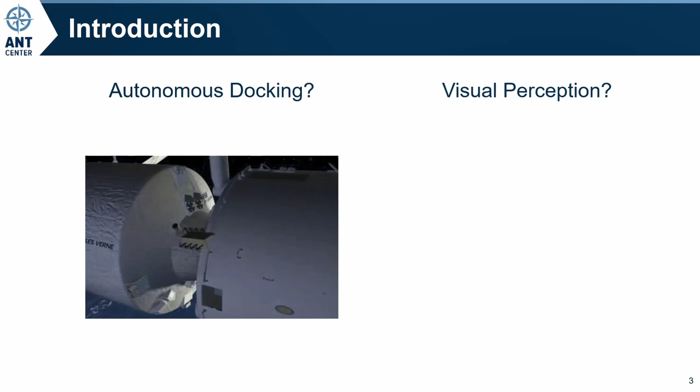So as my title suggests, the problem I'm trying to solve is autonomous docking, and how I'm doing it is through visual perception. So what do these terms mean? In the context of this work, autonomous docking is the approach, contact, and connection between two vehicles without human intervention, while visual perception is the intelligent interpretation of what is seen. So what I'm trying to do here is give machines visual perception, just like we as humans have.

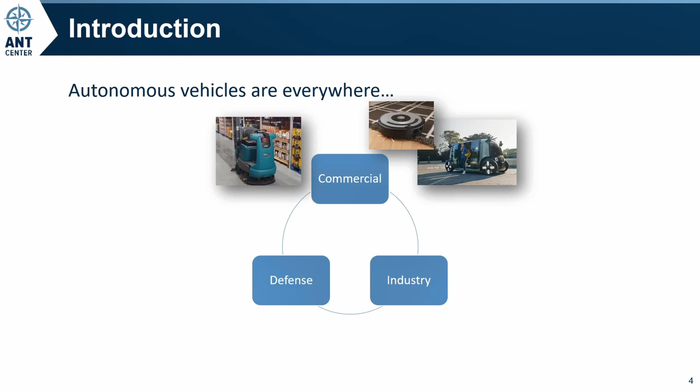But first, why is all this important? Well, turns out autonomous vehicles are popping up everywhere. Whether we realize it or not, we all rely upon them in our everyday lives, either directly or indirectly. So here's just a few examples. In the commercial sector, we have autonomous vehicles vacuuming our carpets. If you've been to Sam's Club lately, you've seen this guy wandering the aisles, scrubbing the floors. We're seeing them pop up in commercial transportation and delivery services.

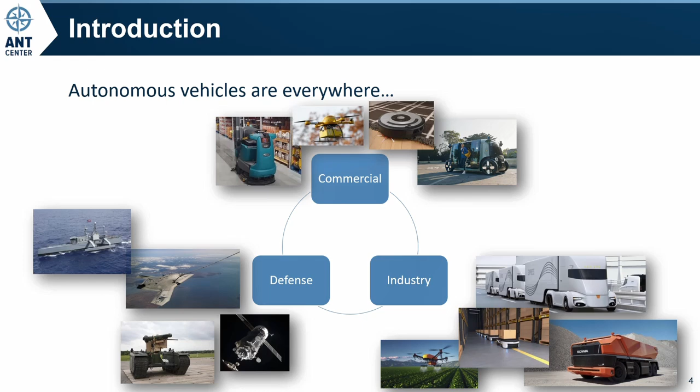On the industrial side, we're seeing autonomous freight, mining and excavation, agriculture, and if you've purchased anything on Amazon, your 2-day shipping is made possible by these guys. In the defense sector, we're starting to see them in air, space, land, and sea, and that's just touching the surface. But there's a problem.

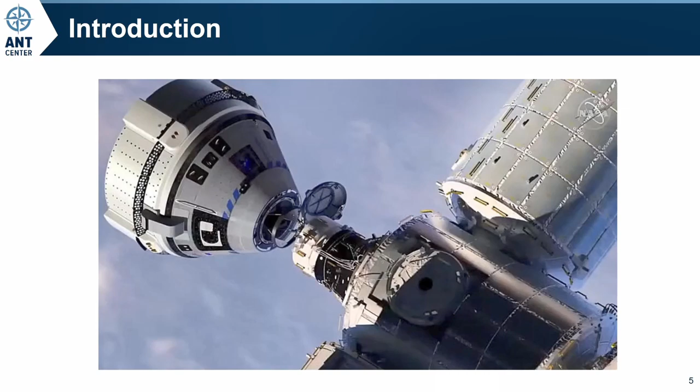Despite their growing presence, autonomous vehicles are limited in their ability to interact with each other and their surroundings. Without autonomous docking, they cannot perform complex tasks such as docking for maintenance and crew transfer in space, transferring cargo, passengers, or data at sea, or refueling mid-air. These limitations hinder their operational range, endurance, and effectiveness. Autonomous docking, once solved, overcomes these barriers and significantly enhances their operational efficiencies.

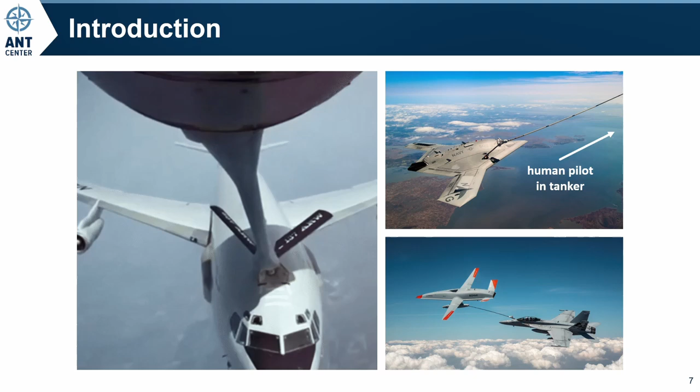In this work, I focus on the aerial refueling use case because of its complexity. On a scale of very difficult to super easy, this task is right at the top. And so the idea here is if I can solve this really hard problem, then I also solve the rest. But I know what you're thinking. Humans already perform these complex maneuvers. So if it's not broke, why fix it?

Well, it turns out us humans are very expensive. We require long training pipelines, we have physical requirements, we make mistakes, and eventually we get old and have to retire, many times taking with us years or even decades of experience. So my solution is to completely remove the human from the loop, mitigating all these factors, and this is how I do it.

My solution is motivated by how humans perform complex docking maneuvers. That is, by using their visual perception, as you see here, along with their hand-eye coordination. In this work, I replaced the human perception with computer vision and machine learning to enable machine hand-eye coordination. Thus, my problem statement is to develop an algorithm that is accurate, reliable, and fast enough to solve the autonomous docking problem, specifically such that it has high performance and generalizes well across real-world operating conditions.

So, what has already been done in this field? I'll begin by answering why computer vision is necessary. We'll take a look at the limitations of traditional analytical approaches, how machine learning overcomes these limitations but requires massive training data sets. We'll then explore the trade-offs between manual and automated annotation techniques, how transfer learning on synthetic images shows promise. Then we'll look at recent work here at AFIT that my research built upon.

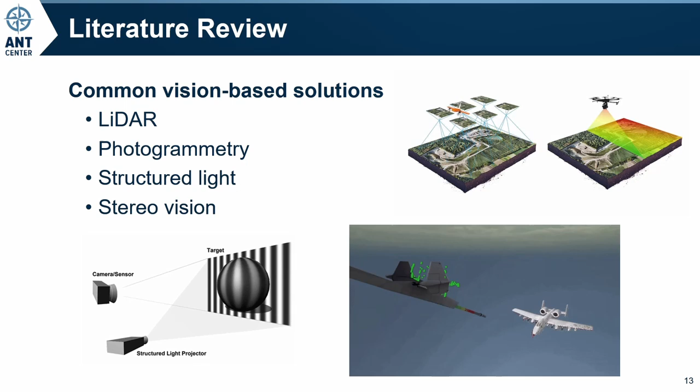This method follows a four-step process where an image is captured, 2D features in the image are found, and a correspondence is made with the 3D features on the object, which are then converted into a pose estimate with methods such as the perspective-n-point algorithm. So just real quick, I want to clarify that pose in this work is the combination of position, XYZ, with orientation, yaw, pitch, and roll. So anytime I say pose, I mean all 6 degrees of freedom there.

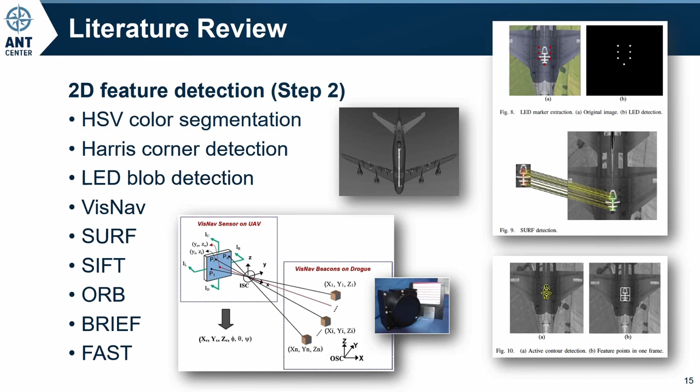The problem with this four-step approach is that in step 2, traditional feature detection methods are unreliable and do not generalize well across varying lighting conditions. In other words, step 2 is very hard. For example, here are some analytical methods commonly used in step 2. These methods are capable of accurate 2D feature detection, but fail when encountering significant changes in lighting conditions, such as glare, shadows, and poor visibility. Additionally, they require separate 2D to 3D feature matching algorithms like the one shown here, which are also unreliable in varied conditions. What we need is a method that generalizes.

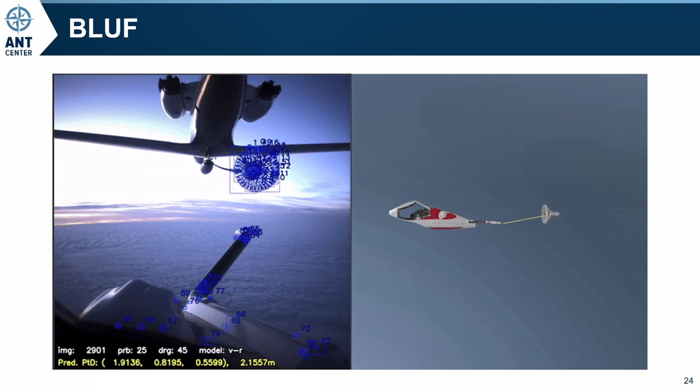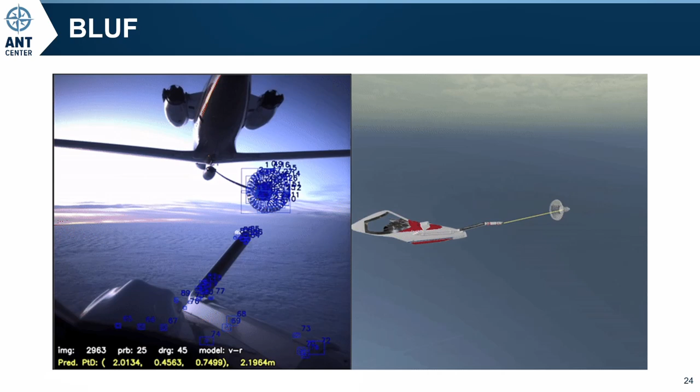Standing on the shoulders of giants, I extend their work to a working real-world solution that I call relative vectoring using dual object detection. Given only the image on the left, the machine can now intelligently determine where the drogue is relative to the probe. So next, we're going to look at study 1 to see how I made all this possible. In this first study, I introduced relative vectoring using dual object detection. I'll explain how it works and how I evaluated it in Monte Carlo simulation.

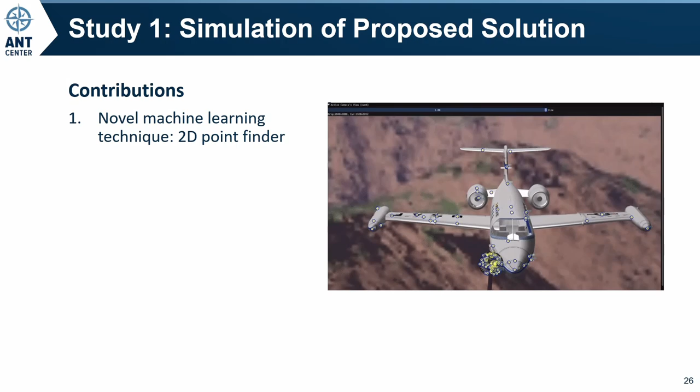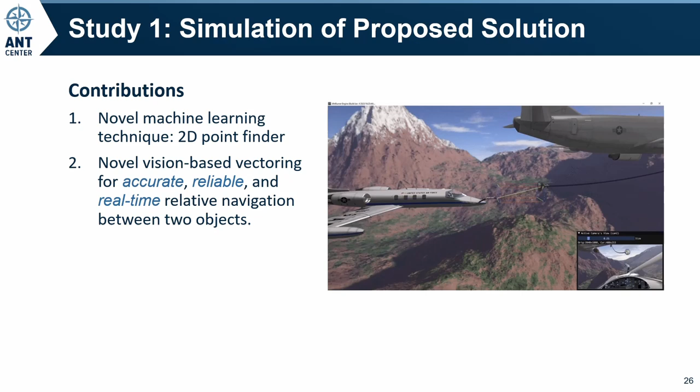I'll also show test results and summarize my findings. My contributions for this study include a novel machine learning technique for finding 3D points in 2D images, a novel vision-based vectoring technique for accurate, reliable, and real-time relative navigation between two objects, and a simulation framework for developing and testing the relative vectoring technique, which includes automation of label training data for

machine learning. As we saw earlier, the 4-step process shown here is common throughout the literature. Unfortunately, this is only a half solution. Take this for example. In this scenario, we have a receiver, a Learjet coming in for refueling, and we have a camera attached to the tanker pod looking back. Now, if that camera takes this picture, and then we follow the 4-step process to get a pose of that drogue,

that pose is defined in the local reference frame of the camera, which is great if we're trying to navigate the camera into the drogue. But that's not what we're trying to do here. We're trying to navigate the probe into the drogue. So what I propose to make this more useful is to perform this process a second time on a second object, hence dual object detection. Then I add a 5th step that converts the resulting poses into a relative vector. This provides a more complete solution.

Dual object detection provides a significant advantage. That is, the camera can be placed anywhere and in any orientation, including sideways or upside down, and as long as the two objects are in the same image, this pipeline will produce the same vector. This means there's no need for extrinsic camera calibrations. So next, I'm going to use that video to explain in detail how the relative vectoring pipeline works.

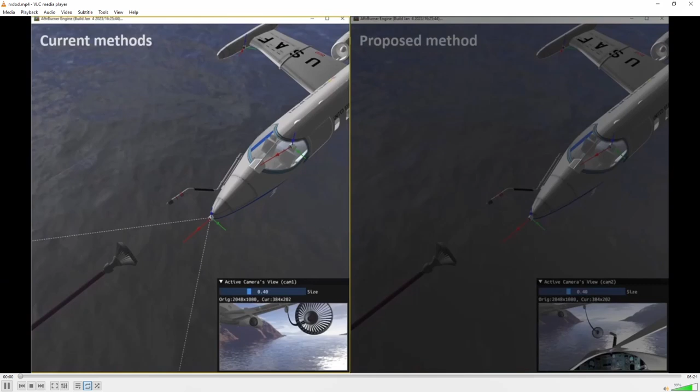All right. So let's begin with the current method. So on the left, I'm just going to pause it. On the left, you see that using the image in the bottom right, analytical solutions can find features and do the 4-step process to find the camera to drogue vector. And if you know that red vector, the precise probe offset, then you could just do some vector math, and that gives you your probe to drogue vector.

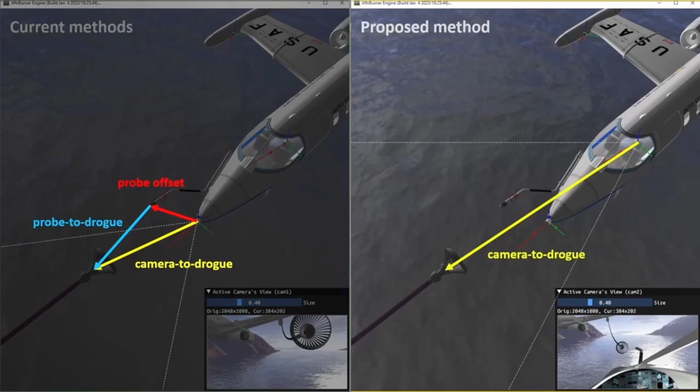But what happens if that camera changes? Say a maintenance technician bumps it, or turbulence causes that camera to shift. You lose that probe to drogue vector. So what I'm proposing here on the right is that we move the camera to a position that sees both the probe and the drogue, and then you can perform that process twice, and then if you find the vector between those, you get that same exact probe to drogue vector, all the while not needing any extrinsic camera calibrations.

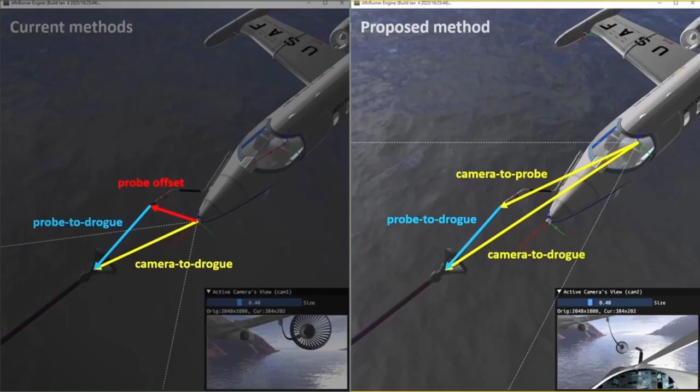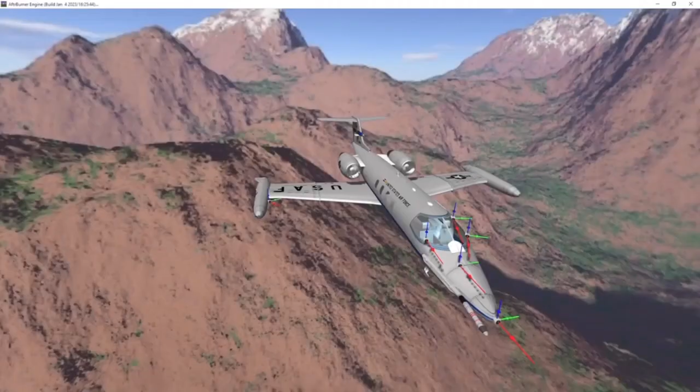All right, so I'm going to skip forward. Here I'm applying the process in Monte Carlo simulation, where the scenario includes a receiver aircraft flying multiple approaches behind the tanker. As shown here, I mounted several virtual cameras on both the receiver and the tanker. In this effort, I report results from 3 vantage points. That's the wing cam, dash cam, and tanker pod cam. The bottom right viewport displays the output of these cameras, which the pipeline uses for relative vectoring.

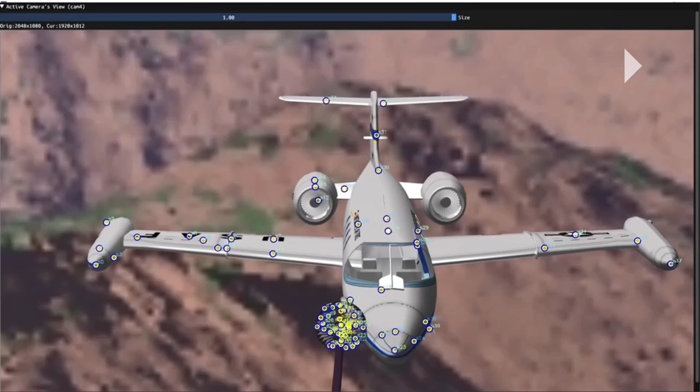Enlarging the viewport for just a moment, you'll see that the highlighted features in yellow are the features that we want the network to find, with the blue points being what the network is actually finding. These blue points are then transformed into a probe-to-drogue vector using a technique I'm about to show you.

So to reveal what's happening under the hood, let's take a look at this diagram. Within this pipeline, I use YOLO version 5 with a novel supervised machine learning method for specific 2D feature point finding. But I'll go more into how we do that in a bit. For now, let's just focus on the pipeline and see how it works. So model point matching is fairly straightforward. Since YOLO also predicts class IDs, I pass these matches to Perspective-n-Point, which then uses these on the top left to align the three-dimensional model for pose estimation.

The resulting pose estimates include a pair of rotation matrices and translation vectors defined relative to the camera. Then I subtract a camera frame probe vector from the camera frame drogue vector, which gives us a camera frame probe to drogue vector. I then rotate this vector into the receiver's local reference frame by multiplying it by the transpose of the probe's estimated rotation matrix. The end result is a receiver frame probe to drogue vector that an autonomous agent can use to navigate aerial refueling approaches.

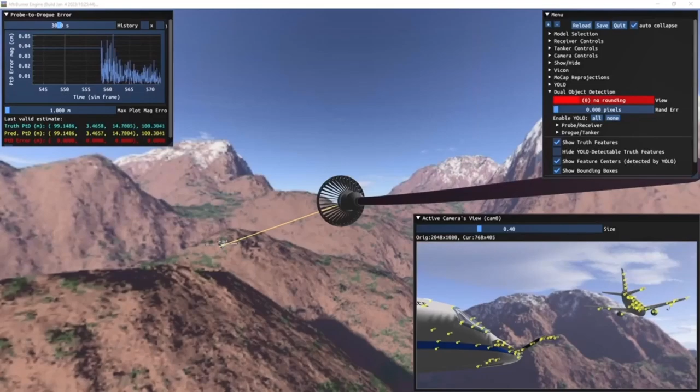Alright, next in this demonstration, I turn off YOLO predictions and replace them with true 2D image points with 0 pixel error. The pipeline produces sub-millimeter accuracy even when over 100 meters out. So if I add random noise, as you can see by the yellow circles vibrating, we see that error in those probe-drogue vectors increases with the random noise. And this tells us that the 2D feature detection is the most important step of this pipeline.

So I accomplish point detection in this pipeline using YOLO, a state-of-the-art object detector. However, the problem with using its traditional bounding box, as we see on the right, is that the perceived 2D object center projected into the image is rarely the same as that bounding box center. This is due to what I refer to as the parallax effect, which is caused by the disparity in projective geometry between points closer to the camera's image plane and those further away.

To visualize this effect, let's take a look at this 2D square floating in 3D space. When I form the tightest fitting bounding box around it, the only time we see the alignment between the true center, that's the blue dot, and the perceived center, that's the yellow dot, is when the camera's image plane is parallel to that of the square. Any rotation of either the camera or the square causes the perceived and true centers to diverge.

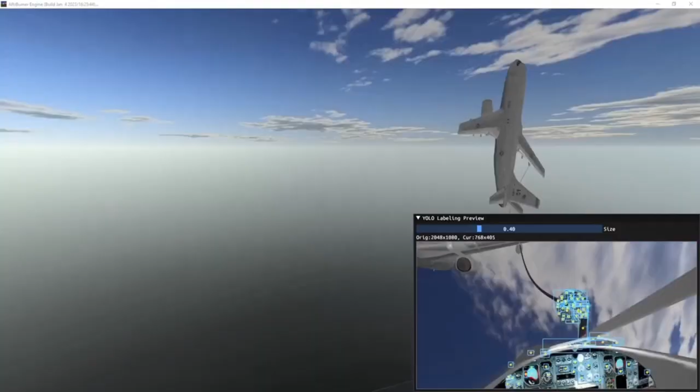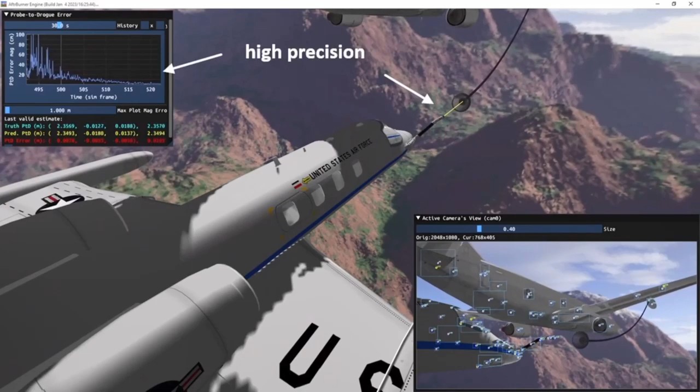All right, so what I'm showing here is that I also add scene augmentation techniques where I change the background, the lighting, perspective, and this results in better model performance and generalization. So after I train our models from labeled images with bounding box corrections applied, I observed YOLO was able to find 2D points with enough precision for the probe-to-drogue vectoring. Here, I also demonstrate the pipeline does not rely on extrinsic camera calibrations. Shifts in the camera position and orientation do not affect the pipeline predictions.

To quantitatively assess the pipeline performance, I collected millions of observations over tens of thousands of random Monte Carlo approaches, comparing truth to pipeline predictions. I found that by switching between multiple models specifically trained on different phases of the approach, the pipeline could navigate the probe to the drogue with high accuracy, reliability, and speed from 120 meters out.

Overall results showed that the relative vectoring pipeline is resilient to occlusions, does not require any extrinsic camera calibrations, is reliable and consistently accurate to within 3 centimeters at contact, and runs at least 45.5 frames per second, making it suitable for autonomous aerial refueling. Alright, so that shows how the pipeline works.

Now, before we jump into the final results, I just want to clarify that the evaluation criteria is accuracy, reliability, and speed, because that's, again, what I said at the beginning would make autonomous docking possible. So accuracy is defined here as the magnitude difference in Euclidean distance between the truth and prediction vectors. Reliability is the valid predictions made divided by the number of predictions attempted. And then lastly, the speed is just the time between predictions.

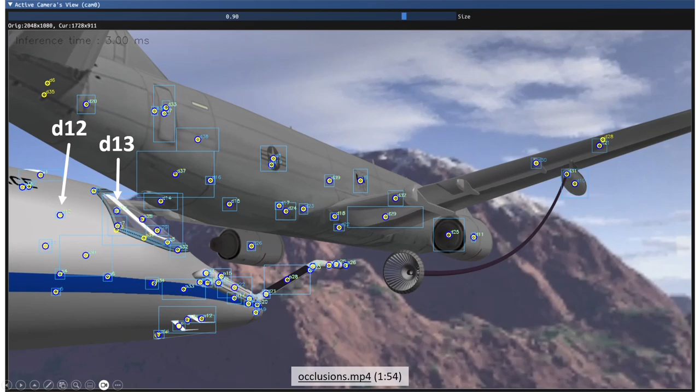see. So finding features on the tanker guides you to the tanker, but also once you get close enough to localize the drogue and make contact with the drogue, you also need another model that's looking at the tanker so that you can maintain echelon formation. So real quick, I'm going to show some really interesting results in this close-up of what this model is seeing.

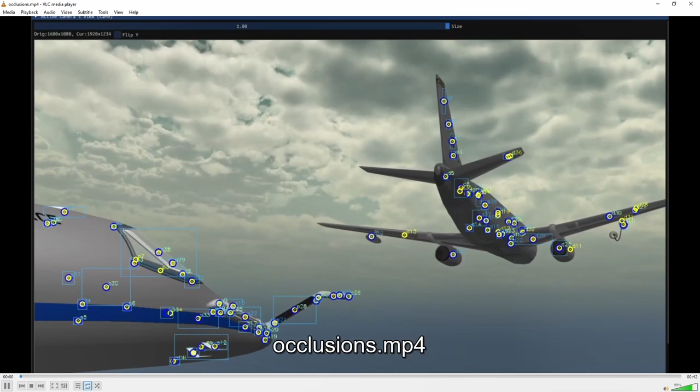We're seeing that there are actually 2 features that are on the tanker's left wing that the network still finds, even though they're completely occluded. So what does that look like? Quick video. So again, look at the features D12 and D13 in the middle. And you'll see them on the left wing of the tanker. You're going to see them disappear. And indicated in blue shows that the network is still finding those features, and very accurately so, despite them being completely occluded. So that was a really interesting observation.

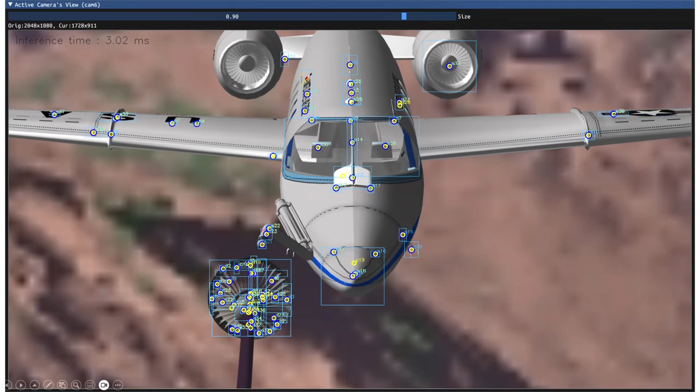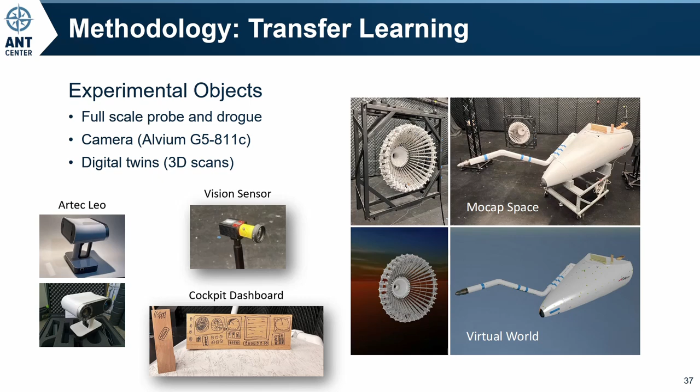So here are the experimental objects I used. I had a full-scale probe and drogue that I procured from CalSpan. The camera, or the vision sensor I use, is there in the middle with the yellow on it. That's the Alvium G5-811c. I performed digital twin alignment using 3D scanned models. So I used that Artec Leo 3D scanner. It's a high-end professional grade 3D scanner that gets really accurate geometry and texture, as you see in the bottom right.

And then here I'm going to jump into my labeling techniques. So the first labeling technique I use is motion capture reprojection labeling. In this case, I use, again, real imagery. So I'm capturing an image using that camera that's mounted on the back of the nose cone. And while I'm capturing imagery, I'm also capturing motion capture data of all those April tags that you see throughout the scene. Those April tags I can then localize really fast in the imagery using the April tag software. And then if I have a 2D to 3D correspondence, I can localize the camera and do the reprojections.

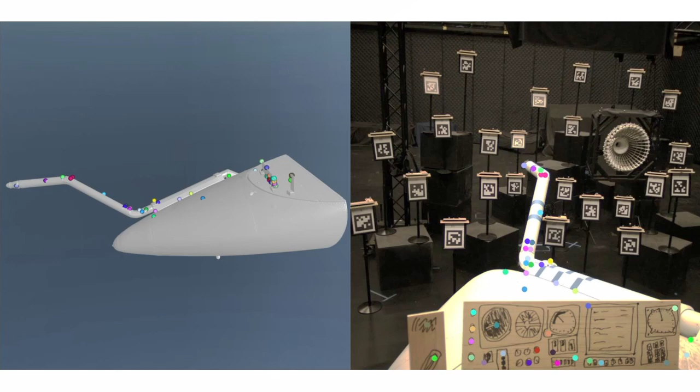So I take the points in the virtual world, I just select points on the three-dimensional model, and because we've performed a digital twin alignment, it aligns really nicely. I then take those three-dimensional points, just like we saw earlier, project them into the image, as you see on the right, and then I go into manual labeling software like RoboFlow on the right, and that allows me to generate accurate labels. And because the camera is attached to the probe, the probe in the foreground doesn't move, so I can use real imagery to label that probe.

All right, so the final technique is virtual projection labeling. This produces virtual images of the drogue. This is the same exact procedure we used in study 1.

So techniques 1 and 3, those are drogue labeling techniques, and then labeling technique number 2 is probe only. All right, so now I'm going to get into scene augmentation. How did I actually augment the scene? That is the background, the lighting, and perspective.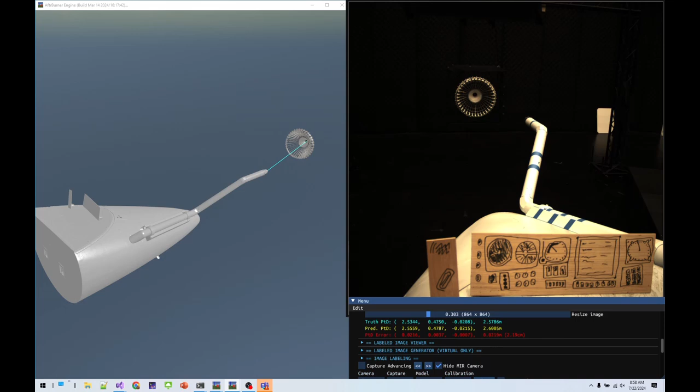All right, so we're just going to take a break real quick to see a live demo of how this looks, and then I'll go into the actual results. For this live demo, I'm going to switch over to my other laptop, and what you see here in the top right is a live camera feed coming from that camera mounted on the back of the probe. And what you see on the left is a digital twin of what's going on inside this room. So those are virtual objects aligned to real-world objects using motion capture data.

So I'm just going to pan around the scene here in the virtual world, get a closer look. And what you see here now is a blue vector that tells us the truth. That's coming from the motion capture system, and aligned with a yellow vector, and that's coming from my relative vectoring pipeline using only the image on the right. And so the fact that we see the blue and the yellow vectors on top of each other is really good.

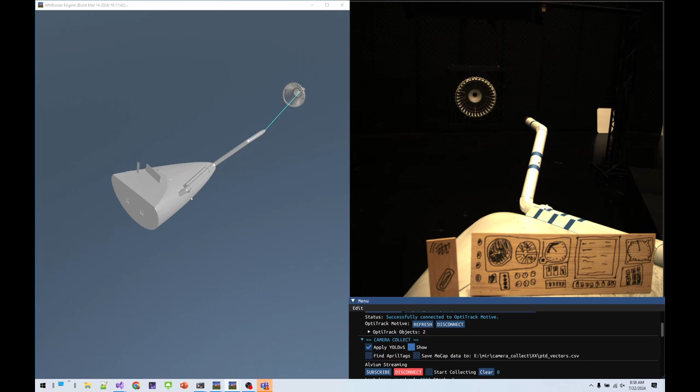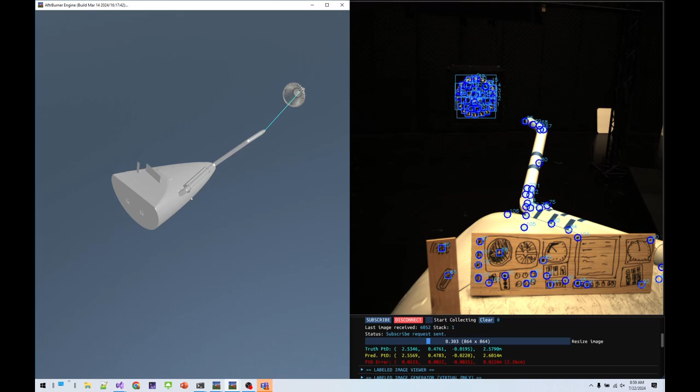So what I'm going to do here is enable the visual of what YOLO sees. So the neural network is picking up all the features in blue here on the right, and from those features, it is able to perform relative vectoring and determine where the drogue is relative to the probe. So what I'm going to do next is just move the probe around. So I'm just kind of pulling the probe back, waving it side to side, and just watch the yellow probe to drogue vector on the left. And it's jumping around a little bit, but for the most part, it's tracking precisely with the truth.

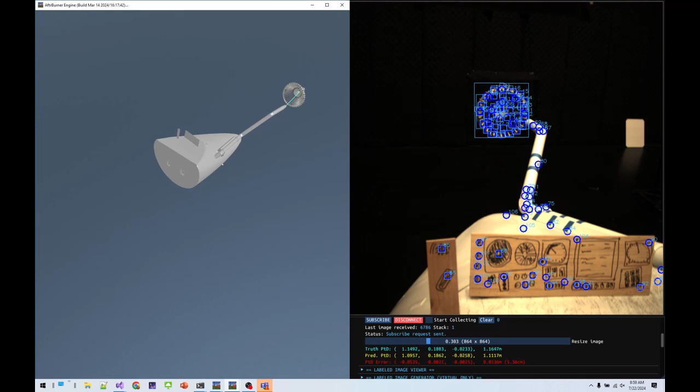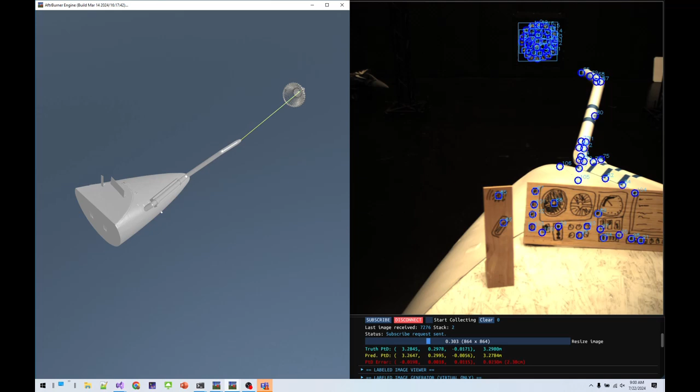And so what we're seeing here is there's some occlusions. The probe just went in front of the drogue, and the algorithm was resilient enough to overcome those occlusions. And so now I'm just going to move the camera around, showing that this algorithm does not require any extrinsic camera calibrations. So you can orient the camera however you want, as long as it sees the probe and drogue features in the same image, then the algorithm works the same, generates the same vector.

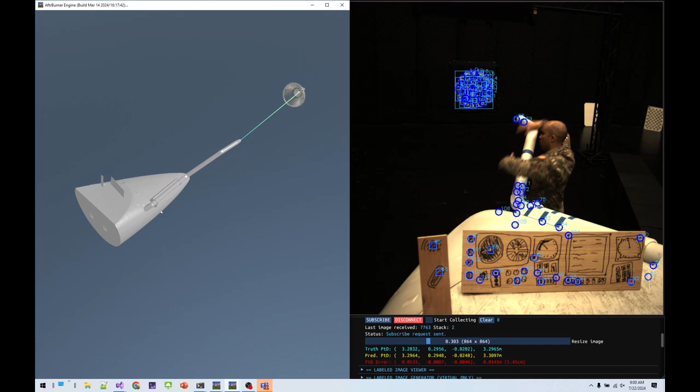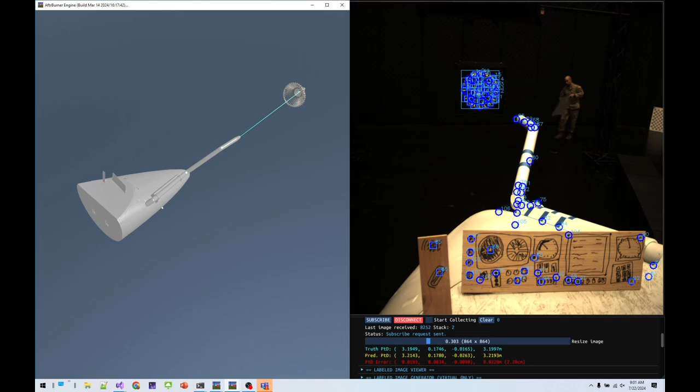Now, as I put my hand in front of features, you see that there are some occlusions happening here, and the pipeline's still working really well at finding that probe drogue vector. I can even stand in front of the drogue and check out that yellow vector. And then if I grab this board over here, I couldn't even cover up enough features with my body, but if I use this board, I can cover up enough features where it will start to struggle. So it doesn't start struggling until maybe it sees like 3 or 4, but as soon as it sees a ton of features, all of a sudden it's very accurate again. And this is what we want.

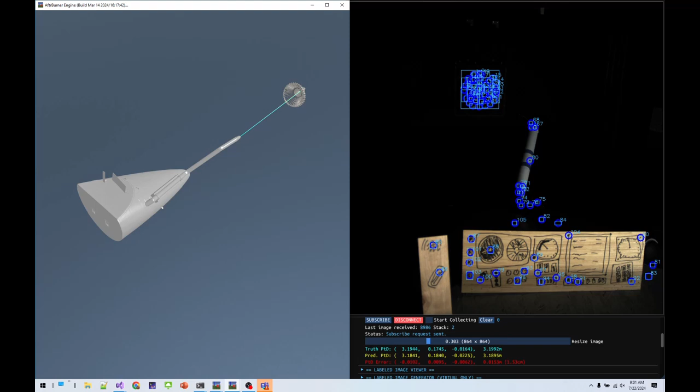So for the next part of this demo, I'm going to just turn off the lights, and I've got a work light here that I'm going to turn on. And so as I shine the work light on the scene, you see that there's lighting changes. These are changes that you're going to see in the real world, right? As the plane's banking, as the sun's glaring from different angles. I'm washing out the drogue by walking behind it. Now I'm kind of shining the light from different angles, and traditional methods would get completely confused here.

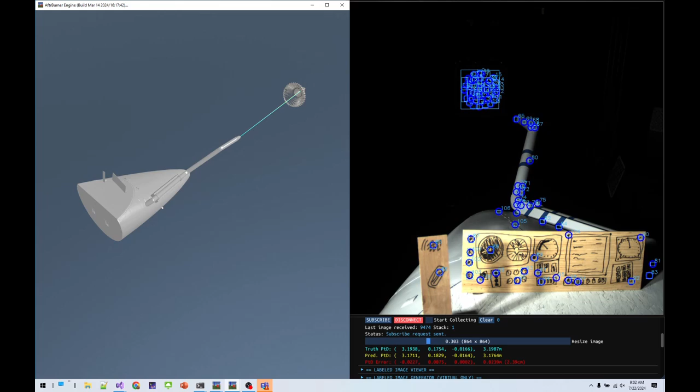In this case, with machine learning, it is resilient enough to find enough features. Even when it starts getting really dark, it accurately finds the features in order to generate an accurate probe drogue vector. So this is what is going to solve autonomous docking.

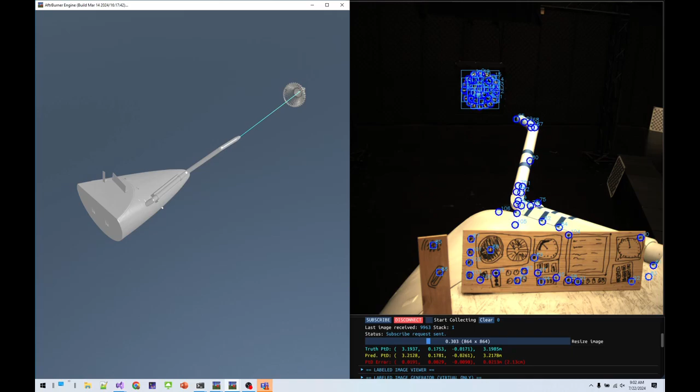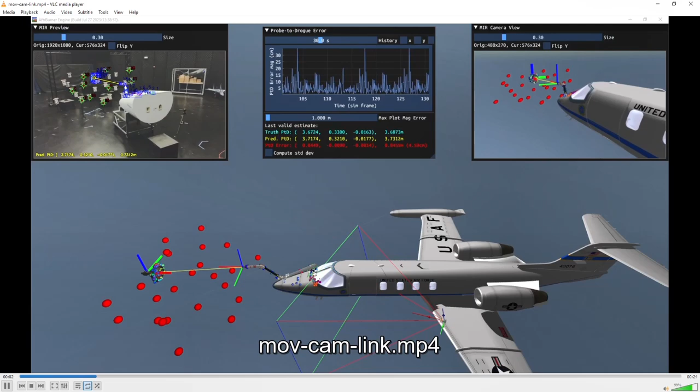And then when I move the camera around, I got a couple clips to see what that looks like. So in this video, I actually moved the camera around. I changed its position and orientation. As you can see, it's producing a very accurate probe-to-drogue vector. This video, I used a different camera. In this case, this has a 3D gimbal on it, a gimbal for more stable imagery. But it's also producing a very accurate relative vector.

And then in this final video, this is the results that you see in the plot on this slide. So I'm moving the camera around, not moving the probe and drogue. And you see that here is the histogram of error measurements, with the majority being within the green, the acceptable range.

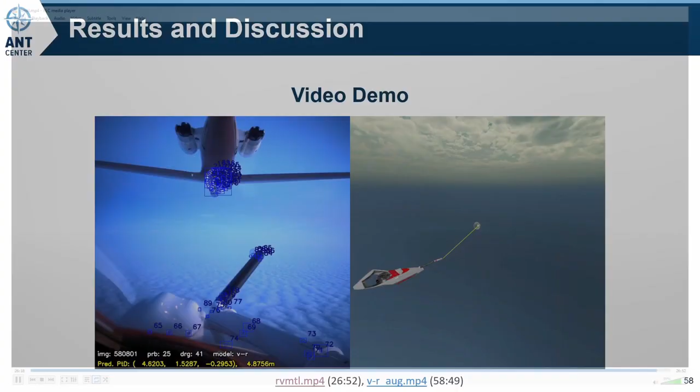All right, so to summarize, we talked about how to generate virtual, hybrid, and real imagery using various labeling techniques, as well as scene augmentation and augmented reality techniques. We generated labels, trained models, and then we tested all the different combinations of models to see which one produced the best, the highest performing, and most generalizing results.

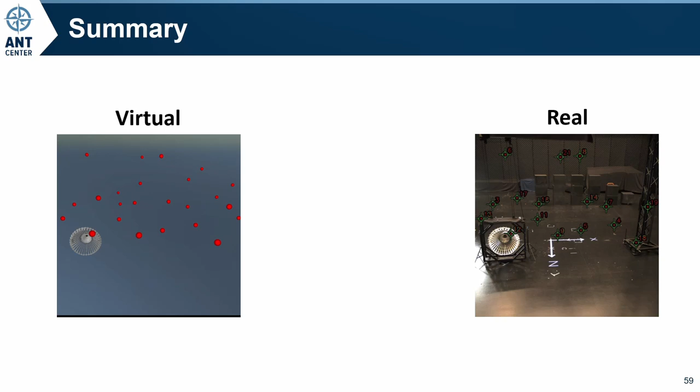So here's just a visual of what that looks like. You have the virtual and real images, where I performed a digital twin alignment using fiducial targets on the right and real motion capture data on the left that localized the camera and allowed me to swap out the April tags with real objects, as we see here. And as long as we don't move the camera, that digital twin alignment is still valid.

I can then take the virtual image, change the ambient, diffuse, and specular to solid green, then do a blending of the two images using a reverse green screening technique. And then I can project known features that are defined in the local space of that drogue, rotate them into the world space, project them into the image, and then surround those with tightest fitting bounding boxes with bounding box corrections. That gives us our accurate, precisely labeled images, virtual, hybrid, and real.

Then finally, we use manual reusable labeling to label probe features, and then use alpha gradient masking to blend the two. And so, as we saw in the results, this produced positive transfer learning that generalized well across varied conditions, also with high performance in real world scenarios, producing results similar to what we saw in study 1. For this work, I have submitted a manuscript to the Journal of Neural Computing and Applications. That publication is currently under peer review for publication.

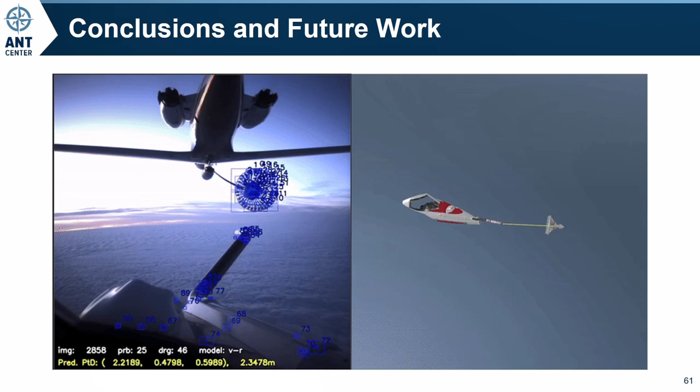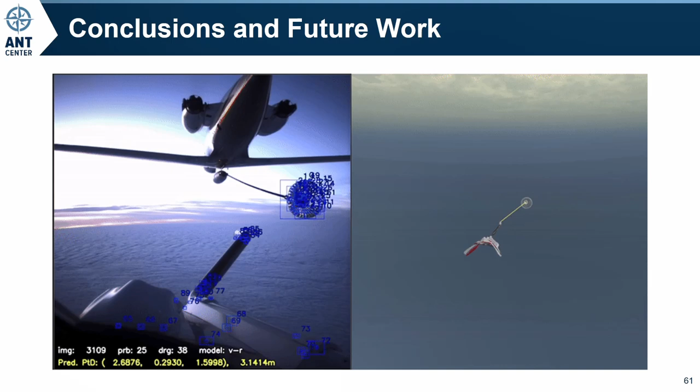So to conclude, I introduced relative vectoring. We found that it is accurate, reliable, and fast, proven in real-world applications, and generalizes well with high performance. We also saw that scene augmentation is necessary, and so where do we go from here next? A few initiatives we're already exploring on the team. We've got more flight tests coming up this December.

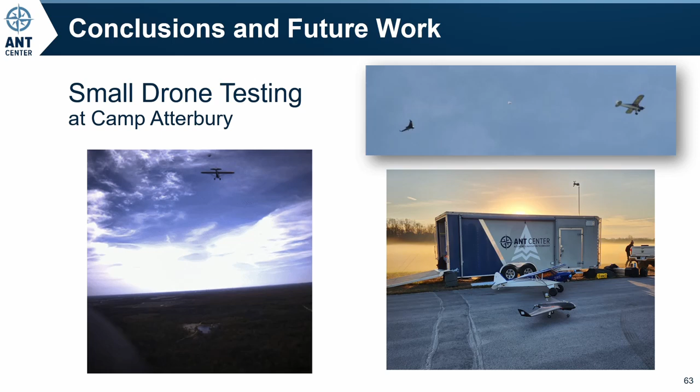Our last flight test, we only had cameras facing up. Next, in addition to facing up, we're going to face the camera looking back at the receiver. And if those two views result in the same vector, then we have a very high confidence that those vectors are accurate and reliable in real-world conditions. We're also doing some drone testing at Camp Atterbury, applying these to smaller air vehicles.

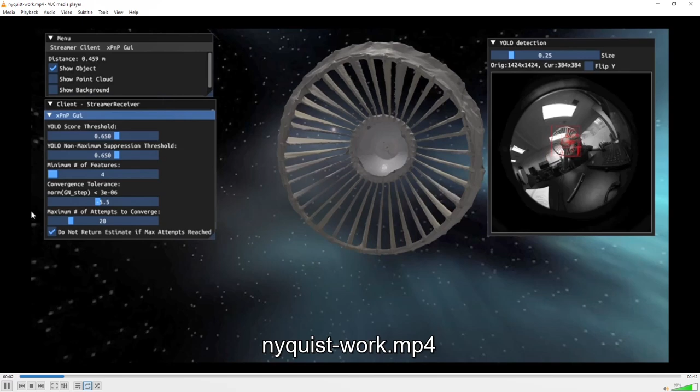We've got some initiatives that we're working on to apply this to omnidirectional or fisheye imagery. So I have a quick video that shows what that looks like. One of our researchers, Richard Nyquist, put this together. He actually trained YOLO to find features in fisheye imagery, which is really exciting, because if we can apply this to fisheye imagery, all of a sudden we've got a much wider field of view. We can see behind us, in front of us, and all around us.

And then Ryan Raettig, another guy on our team, he actually applied this to real operational data, which is super exciting, because what we see is that these labels are very consistent and have a really high chance of producing really good relative vectoring results.

So some other things that we haven't quite explored or that are on the horizon is applying event-based vision sensors that can operate at much higher frame rates. We're also looking at ways to pick out better features using genetic algorithms, and then the list goes on. So the ones I just showed you are my favorites. There's so much more work to do, and that ends my presentation.